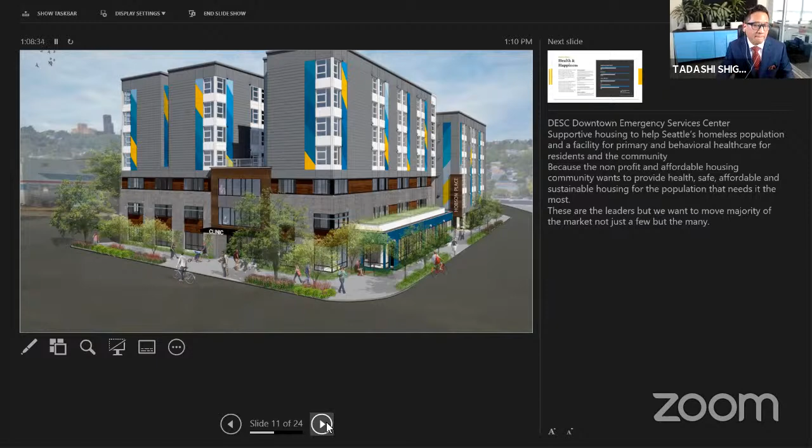So why are we doing this too? It's because we want to create buildings that are healthy environments, that have incredible indoor air quality. And people with compromised health systems, with chemical sensitivities, need better and more proper ventilation. And also because of COVID and because of the summertime now, isn't it crazy that we are having fires now and that the outdoor air is worse than the indoor air?

Passivhaus solves these issues and also creates occupant comfort, so that there are even temperatures, fewer cold and hot spots. Also, it's quieter because we're reducing the thermal bridging, which also reduces noise, and then there's ultra efficient performance where we can actually save up to 75% of the overall energy use, and then building durability. Of course, we want buildings that are durable, that will last, that will reduce mold and mildew, and that will be a statement of what we've done in these times for generations to come.

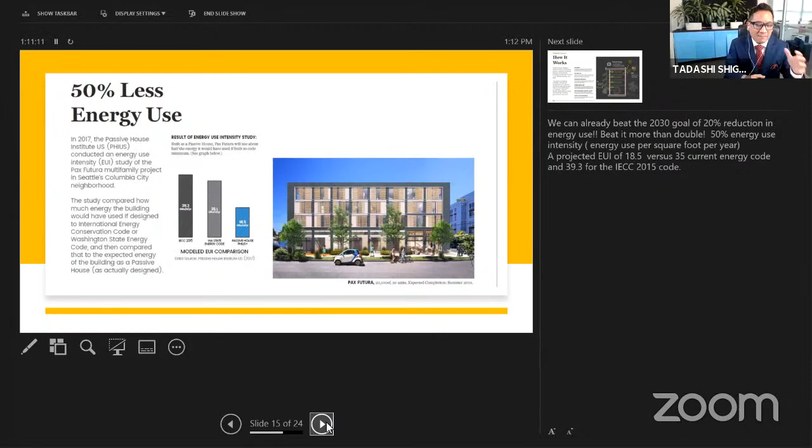So in a nutshell, how does Passivhaus work? Well, it's a fairly easy concept. However, it's taken thousands of hours of sweat and anxiety and tears and mistakes to get us where we're at today. But Seattle's biggest advantage is that we have an outstanding brain and heart trust of people who know how to execute this and deliver Passivhauses right now that are actually affordable. It does take an integrative design process, better and more thoughtful design through Passivhaus, but we can do this right now.

And it takes air sealing details, where we really want to provide a submarine-airtight building enclosure. There's a slogan that we say in the Passivhaus community: build it tight and vent it right. In Seattle, we normally want to keep the heat in and the cold out, and now also the smoke out. We want to do this also by having continuous insulation, the best insulation that you could put in these buildings, to eliminate the amount of heat going in and out of our buildings.

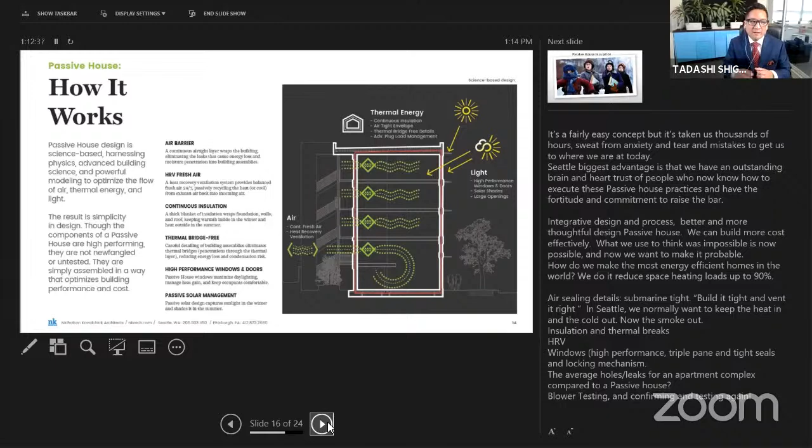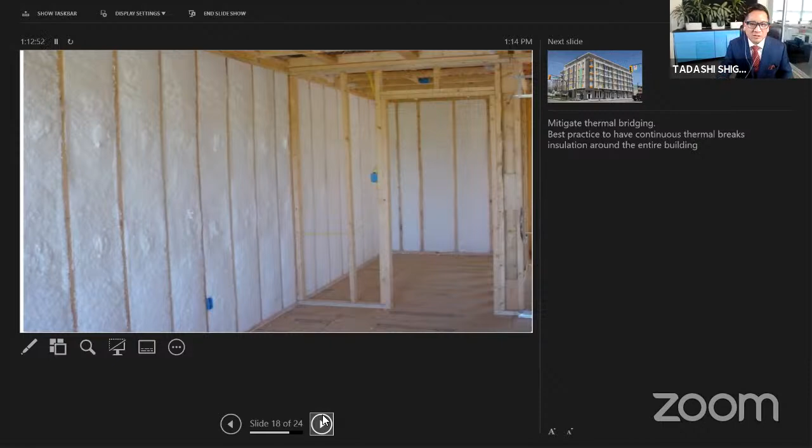Of course, you're going to have Passivhaus insulation like this, which looks like this in a building, to mitigate that thermal bridging. Best practice is to have continuous thermal breaks throughout the entire building. We also want to let in the sun during the wintertime when it's low on the south horizon, but also block it during the hot summers. It's that simple.

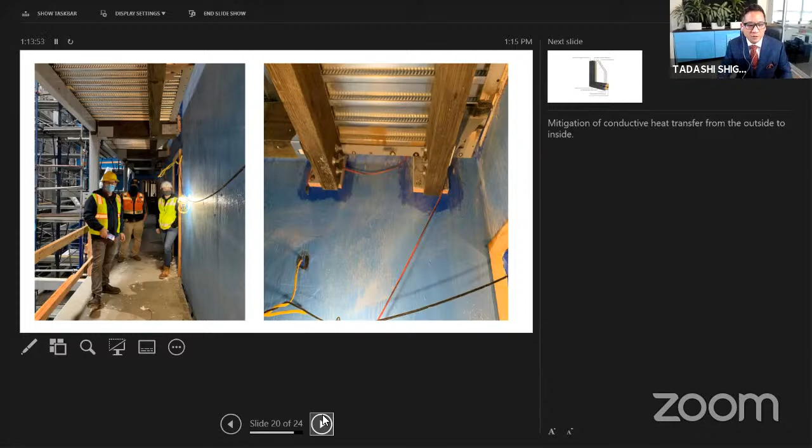But it's these types of attention to details that we figured out how to do and that we keep on figuring out how to do at each project. That is our advantage here in Seattle, and these are the things we need to pay attention to in order to produce a building that has such an amazing low energy use.

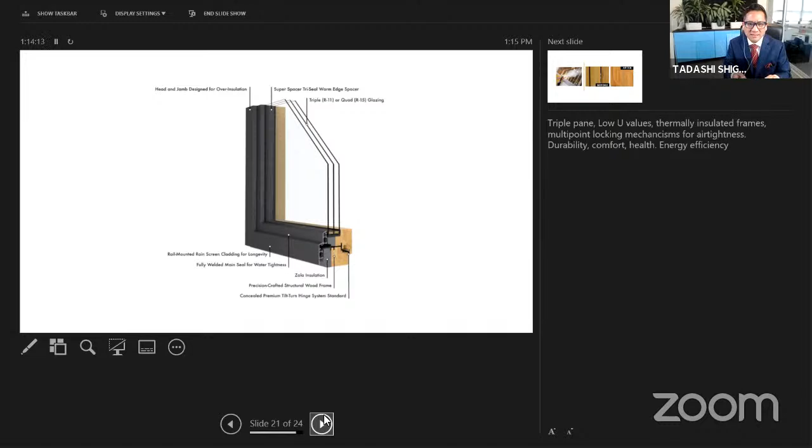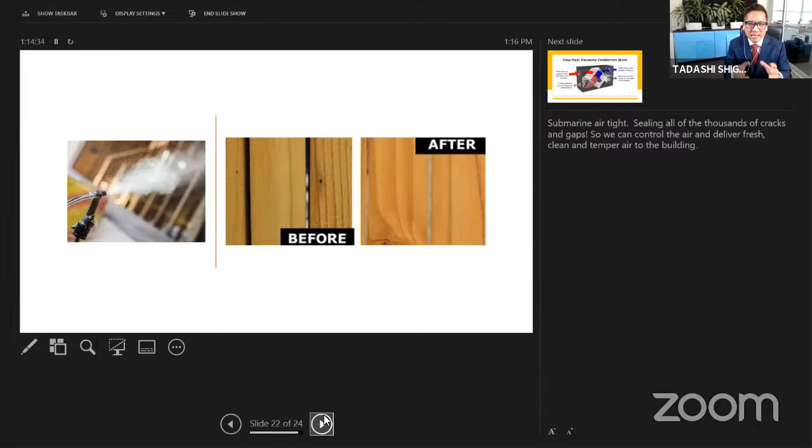Another important thing is the components of the building, of course: triple pane windows, low U-values, thermally insulated frames, multi-point locking mechanisms for airtightness. This creates a building that is durable, comfortable, healthy, and energy efficient. And when we're trying to make a building that is super airtight like a submarine, we have to pay attention to all the thousands of cracks and gaps, so we can control the air and deliver fresh, clean, and tempered air into the building.

And when you're able to stop the air, one of the biggest advantages of these buildings is all buildings and humans need to breathe. And how they're able to breathe and control and filter the air is through heat recovery ventilation systems. So it takes the hot air that we spend a lot of money heating up, and when it exhausts it, it goes through a heat exchanger and it directs it outside.

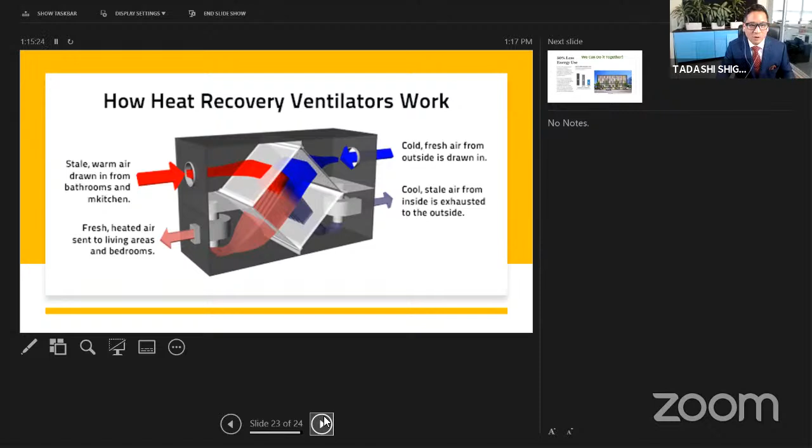But most importantly, when it brings in the new air, we can filter it with a HEPA filter. It goes through the heat exchanger, and then we can appropriately distribute it and control it to the places where we want to get air out and bring fresh air in. And most buildings do not have this, but we're figuring this out because of Cascade Build and the Passivhaus community. So, you know, we can do this together.

You know, the Emerald City, I believe, can become that shining gem that other cities can look up to and point to and get inspired from. But if we can pull together and work together, this is all possible.

Awesome. Thank you so much, Tadashi. Up next, we have Mike Eliason. Mike, you want to take it away? Yep, I'm going to share my screen. Awesome. Let's see. And thank you so much, Tadashi. That was fascinating. Okay. Do you see a log? We do. We see a giant log. Okay, hold on just 1 second. Everybody disappeared. Okay, so I'll keep my video off for this, keep it short and simple.

But one of the things for me that's really important is that policy is paramount to really expediting the reach of this, right? We need the market to get there, but what's really driven the mass timber and Passivhaus community in Europe has been legislative policy. So for me, it's kind of this really good meshing, right? We need a little bit of the market, but the market needs incentives, and so the legislation can kind of do that.

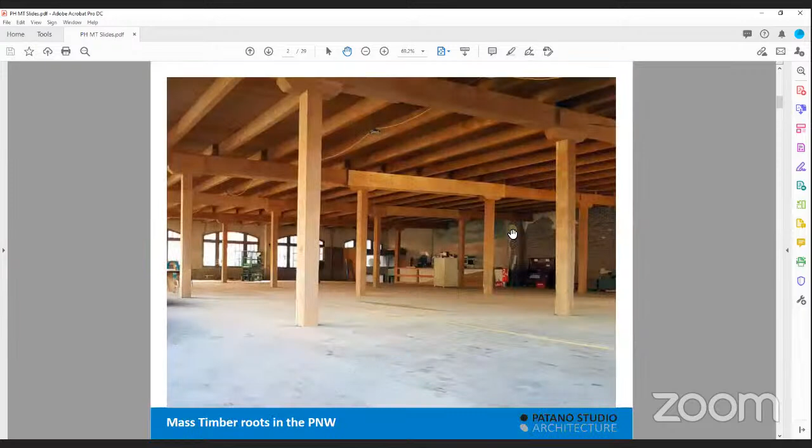But mass timber today is really about prefabrication. It's really about engineered components and doing things offsite to do these really elegant and high quality buildings. So what is mass timber? Like I said, Auto Row in Capitol Hill, all of these old buildings, these big heavy timber frames, you could qualify this as mass timber, but all of this stuff was really built on site, right? It wasn't being engineered and constructed in a workshop. It's not prefabricated, so everything was done on site.

But what's happened in the last 30 years, specifically around Germany, Switzerland, and Austria, is there's been this huge push towards innovative wood products to build high quality, low energy buildings. And so some of the components that they're using: glulam, which is on the top left, we have that here in Seattle. Cross-laminated timber, coming clockwise on the right, which is kind of like plywood, but it's several inches thick, so it's several layers of wood that are alternating the direction that they go.

On the bottom right, this is dowel laminated timber. This is effectively 2x6s. They're all ganged together on an end, and they run a dowel that friction fits everything. So there's no glues for the dowel laminated timber. It's a really elegant product. There are a number of different profiles that you can do.

And so we're seeing these components start to be fabricated in the US. I think in 2011, Structurlam up in BC was one of the first outfits to start building CLT. And then today in the Pacific Northwest, we have about 5 or 6 outfits that are making these panels and bringing them out to market. But there hasn't been a lot of push from the US side until recently on innovation and research.

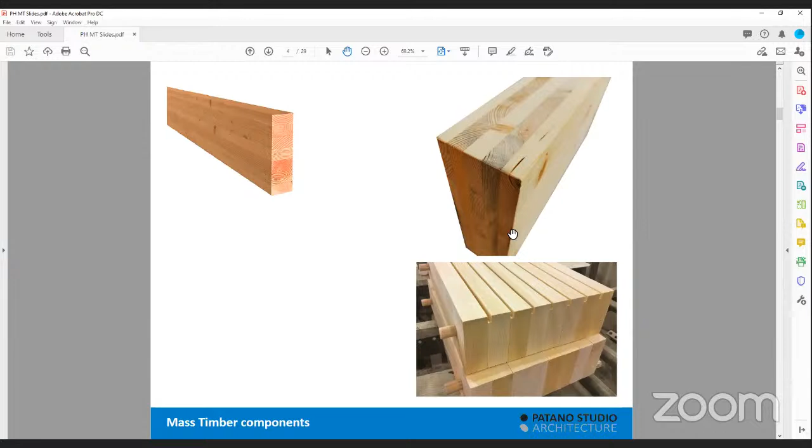British Columbia has had a wood first policy for a long time. They've got a lot of funds and strategies to really expedite the development of this. And so when we look at the adoption of mass timber in British Columbia, it's unfathomable how many projects they've had going in the last couple of years.

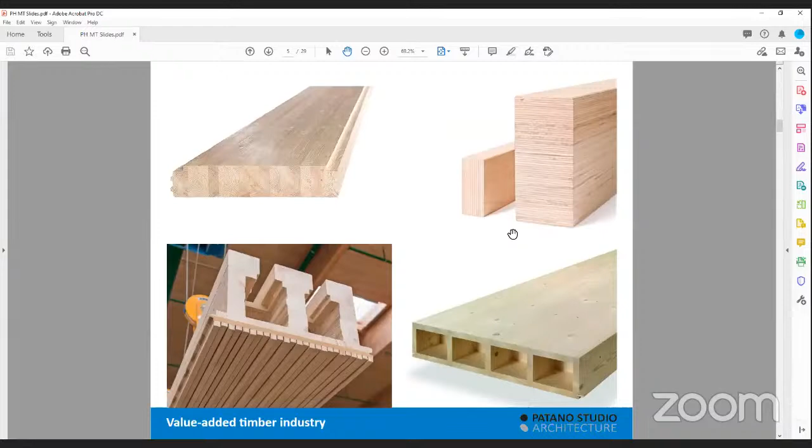But like I said, the heart has really been Central Europe, and so CLT, DLT, those products came about 25, 30 years ago. But in the time since, they've really taken this to another level. There's this whole value-added timber industry. They've got more innovative products that they've brought online. These are just various things that you can get in Europe now that we can't quite get here. Hopefully one day, we'll be in that position.

But they're really pushing these innovative ways to construct buildings that look good. They have the potential to store carbon, depending on if the forests that the wood is coming from are sustainably harvested. There's the whole aspect of biophilia, right? So you look at wood, it feels good, it looks good, you can smell the wood components, it reduces your blood pressure, and it's this connection to nature, right? It's such a phenomenal building product. And so the EU has really just been running with this.

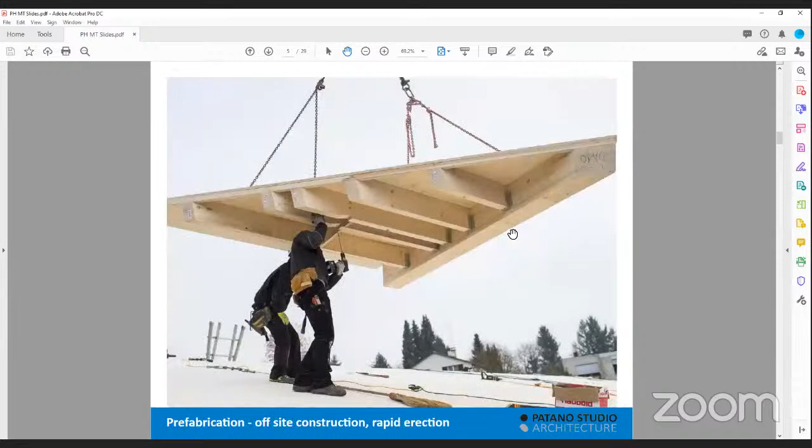The big thing now is prefabrication, offsite construction, rapid erection. So all of this component is framed. It's all built in a factory. So it's safer for the people who are building it. It's clean, it's dry. And all of the components are built off site. They're brought in on a truck and craned directly into place. And because of the processes and the quality controls they go through, the design and fabrication of all of this, right? It goes together like butter. It just drops in place, fastens, and you're good to go.

The thing that I love about this is that, especially in the time of COVID, these projects don't require a huge number of employees on the site at the same time. With a medium-sized mass timber project, you've got maybe somewhere between 5 and 8 guys putting everything together, and you still have all of your other trades and everybody else is busy. But during the structure installation, it's fast, it's clean, it's safe, it's quiet for neighbors, right?

So with concrete and steel, it's loud. There's smells coming off of the site. There's a lot more trucks that come onto the site. So in urban housing, I think there's something really fascinating about looking at mass timber as this component of building better within our neighborhoods. And as we continue to densify in our urban villages outside of the downtown core, I really feel that will become fairly critical.

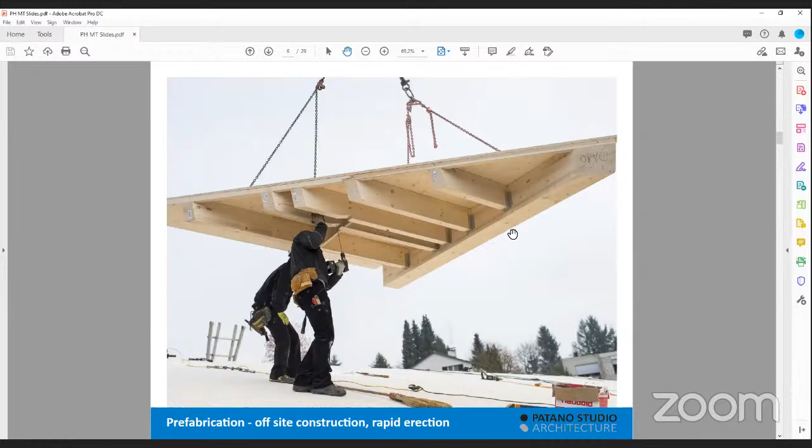So you could have solid panels. This is a CLT panel. It's erected off site, brought into place, craned, and fastened down. It's a super quick process. Floors, it depends on manufacturer and some other things, but you can do 10,000 square feet in a day. So if you have a building that's 5,000 square feet and 4 floors, conceivably you could get it framed up in a couple of days.

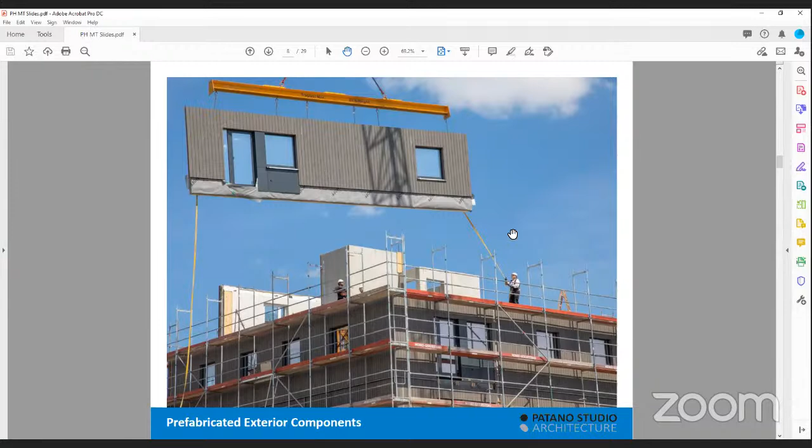The other thing that's really fascinating is that Europe and British Columbia and the Passivhaus community are really starting to push this as well. You get your exterior components, your walls, your roofs, right? Everything comes installed, ready to be put in place with no finishes necessary. So all of this, again, is done in a factory. Your windows are installed, your siding is installed. They bring it out to site when it's needed, and boom, it's dropped right into place.

Modular wood modules have become a staple in the wood community in Europe. We see this on some multifamily housing in the US, but not at the scale that we do in Germany. They're using it for schools, they're using it for dormitories, hotels. There's some really just beautiful hotels using these CLT wood modules, and even social housing for refugees.

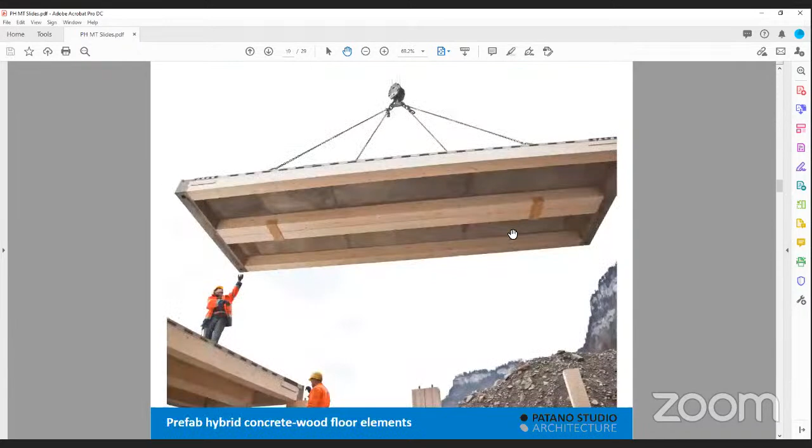And in the last couple of years, the industry has moved towards building taller, and we've seen some proposals for some tall mass timber projects in Seattle. There's a number that are in process, a 60 floor tower underway for Vancouver. Again, passive house, mass timber, but there's aspects with the fire rating that need to be thought through.

And so one of the ways to do that is to combine the fire resistance and strength of concrete, so having the concrete floor, but using the flexibility of the wood to hold that frame. So again, building this hybrid component offsite and then trucking it right into place and dropping it onto wood columns and fastening it in place when it's needed.

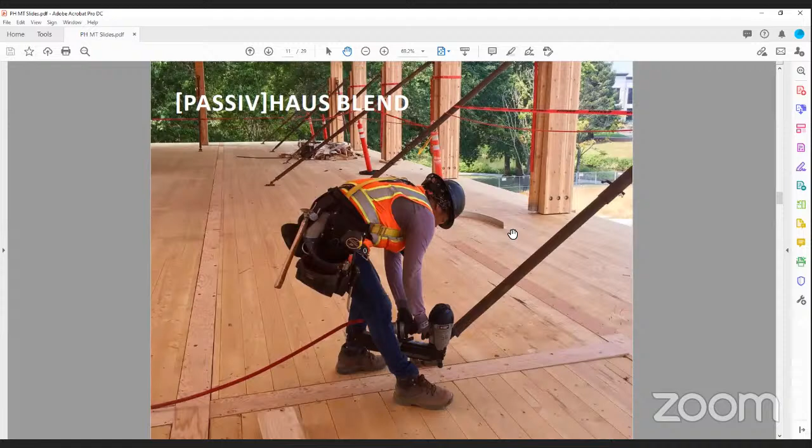So what is it about mass timber that pairs well with passive house? I like to call it the passive house blend, right? House blend coffee. There's something very Seattle about that.

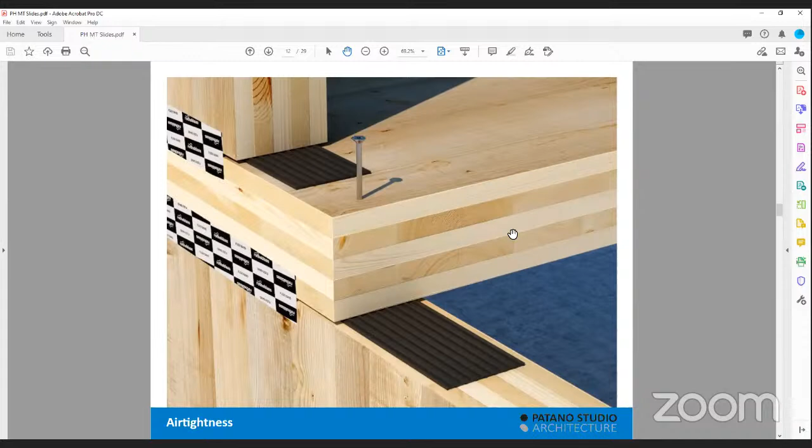And the walls. So the Building Science Corporation is a big building science industry group on the East Coast. They like to talk about the perfect wall. And so the perfect wall is you have your rain shedding element on the outside, your insulation inboard of that to keep everything warm and dry. You've got your weather barrier that keeps everything tight, and then your structure all the way on the inside, right? So all of this is kind of this really clean and efficient approach to separating everything out and having this building that is durable, like Tadashi said. It's high quality, it's pleasant to look at.

And so mass timber takes this concept and really just kind of amplifies it, right? So we have our rain screen, which could be metal, wood, whatever you want to do, and then the support, the battens for the rain screen. Our insulation, again, goes on the outside, and this is critical for passive house. This is what gives us our continuous insulation that's thermally broken, right? So we're breaking the outside envelope and the air temperatures outside with our structure. What this also does is this moves the dew point outboard of our structure.

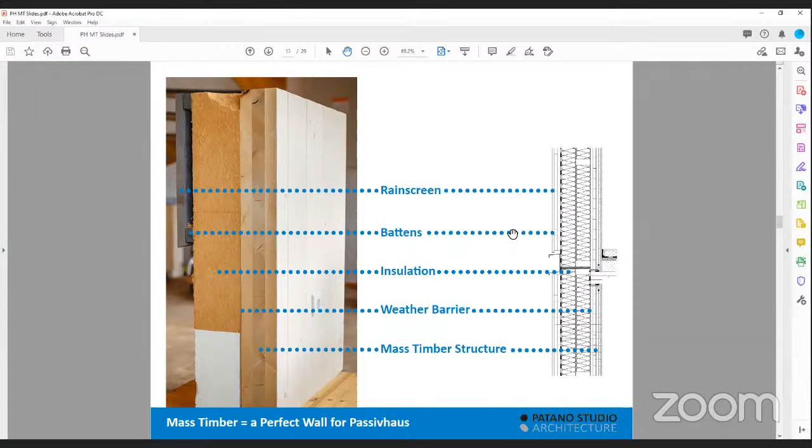So our CLT, our mass timber structure, will never have mold issues or moisture issues unless there ends up being a leak in the building. So it really becomes a way of ensuring the durability and longevity of these products, which is good because when the building has reached its effective lifespan, then we can reutilize these panels.

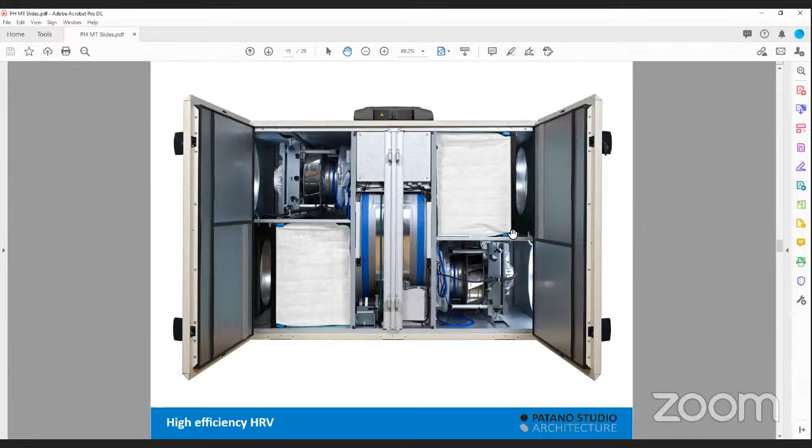The one thing with multifamily and public works with passive houses, the HRVs tend to get larger. Our energy codes are already moving in this direction with requirements for dedicated outdoor air. And so what this really does is it takes it up a notch, right? So we get the filtered air that Tadashi talked about. We're keeping our heat inside. We're really creating a space that's got a high quality interior environment for workers, for people who live there, for students, right? Like air quality in schools is critical, especially during COVID. And we don't want a lot of carbon dioxide building up in rooms. And so this helps control that. And then it helps control just the rate of fresh air.

And everyone that I've talked to in the passive house community for the last month, the smoke issue and COVID, so air quality, ventilation, it's really the only thing anyone's talking about. All of the other issues I think are critical, but I think moving forward, the Cascades are drying out, right? We're gonna need to look at utilizing public works as these fresh air centers. So if we're building them to passive house, right, then we're ensuring that these are a space of respite that people can go when we have weeks and weeks and weeks of smoke.

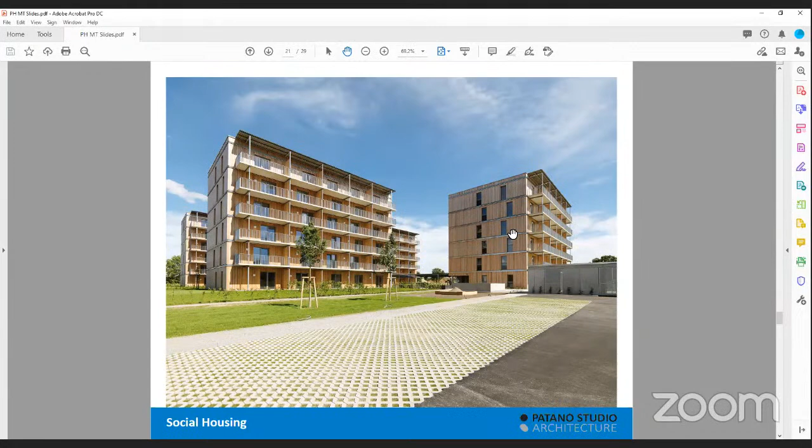And housing. So it's applicable for social housing, market rate housing, this broad array of housing that we could be building mass timber passive house projects. And so here's some of the things that the EU and a couple of other places are doing on policy. In 2010, the EU signed off on the Energy Performance of Buildings Directive. And this is a broad array of policies designed to basically kickstart the improvement of really poor energy performance in building stock. So you have to think about the EU, Europe, buildings that are hundreds of years old. A lot of them don't even have insulation.

So they're taking it to the point where, okay, we need new construction to be energy efficient, but we have to come back and improve all of our existing stock because it's moldy, it's not durable, it costs a lot to heat, and it's also using a ton of energy through that process. By 2016, they updated that legislation that all buildings built by the end of 2020 had to be nearly zero energy buildings. The Passive House community has been leading on this for over a decade at this point. And effectively, Passive House is a nearly zero energy building. And so we're seeing that states are utilizing Passive House as a means of incorporating that.

The German state of Baden-Württemberg in 2018 passed the Holzbau Offensive. It's a wood construction offensive. It's a state-sponsored initiative for the promotion of utilizing local wood, local mass timber, local jobs, right? And adopting modern timber practices for multifamily, kindergartens, schools is really an element of their climate protection strategy. Similarly, the federal state of Salzburg, so there's the city, but around it is the federal state. This year, they're looking at adopting a 20% mandate for wood construction in multifamily buildings.

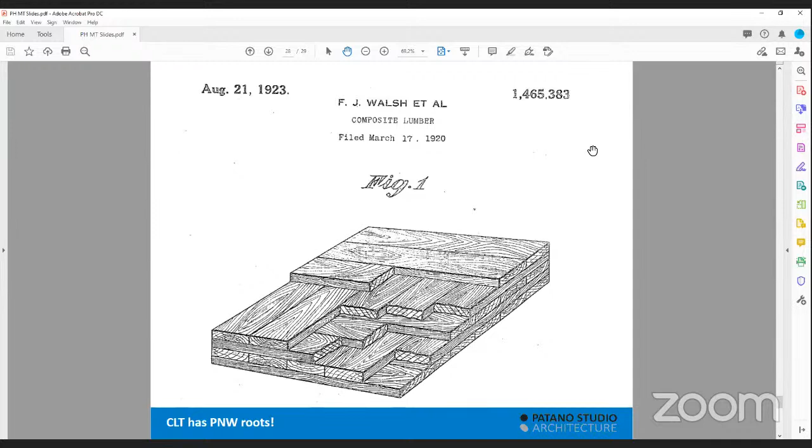As Tadashi said, we only have a couple of mass timber multifamily passive house projects in the city. So we have a long way to go, but we have the know-how, we have the people, and we also have the roots. So this is a patent application from 1923 from some guys down in Tacoma, right? This is in our roots, right? We can do this. So that's what I have.